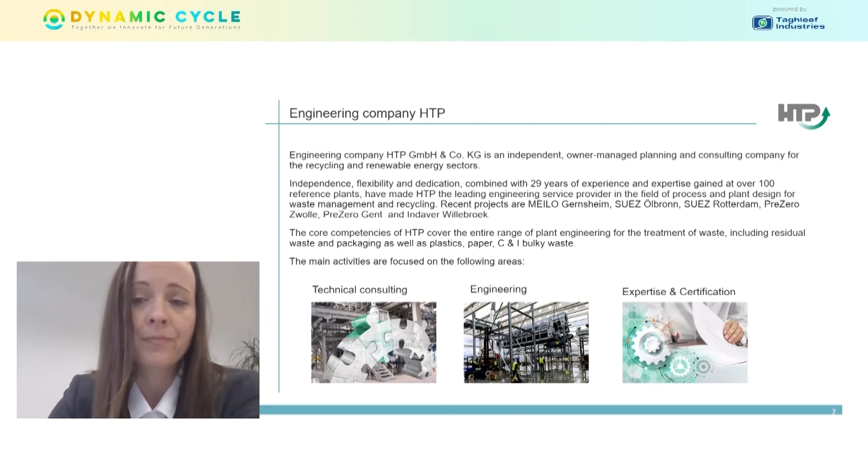Since 2011, we have carried out recyclability assessments for packaging and goods according to our own standard for packaging manufacturers and brand owners. We also perform research and development in this field. Due to the high demand, we founded the Institute in 2014 and published our own standard. We work as publicly appointed and sworn experts for packaging disposal, and perform expertises for courts and public clients in our role as sworn experts, independently and free of directions.

Our standard is an EU-wide audit standard for packaging for all material types, accepted by the industry and in accordance with the norms EN 13430 and ISO 14021. Our work is backed up by almost 30 years of experience in plant design.

One of the founders of the Institute is the engineering company HTP, which has nearly 30 years of experience in plant design; over 100 reference plants were planned by them. The core competencies of HTP cover the entire range of plant engineering for the treatment of waste, including residual waste and packaging, as well as plastics, paper, commercial and industrial waste.

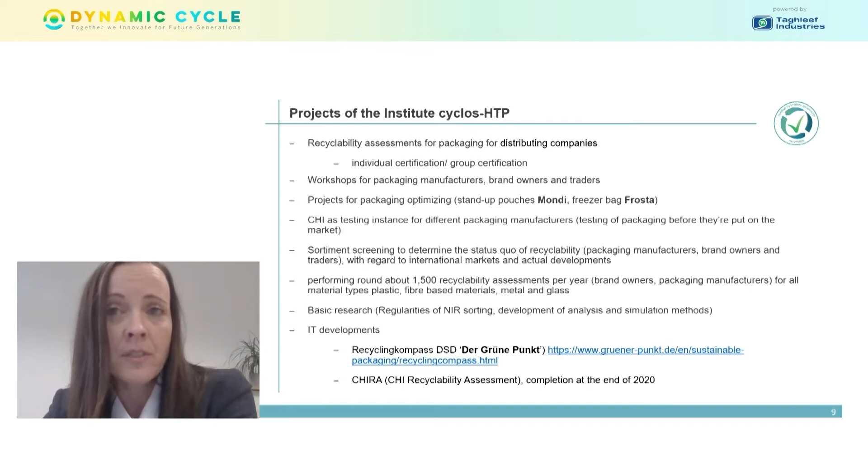The Institute Cyclos-HTP performs recyclability assessments and issues a certificate if the test result is positive. We also perform workshops to train packaging manufacturers, brand owners, and other parties involved. The Institute is a testing instance also for different packaging manufacturers, meaning that packagings are tested and accompanied in their development before they are put on the market.

The assessments are done for all packaging types, meaning plastics, fiber-based materials, metals and glass. And we also do some research and development in these fields, and IT developments like our assessment tool, CHIRA, which we would like to launch at the beginning of the next year.

CHI is not organized. CHI is the abbreviation of the Institute Cyclos-HTP. For reasons of independence, but the shareholders of CHI participate as independent experts in panels or committees, for instance, CEFLEX, the technical committee, RecyClass, and we advise the Federal Environmental Agency and the Federal Ministry for the Environment in Germany.

For instance, a recent research project is commissioned by the Federal Environmental Agency. It is the review of the effectiveness of Para 21 of the German Packaging Act and has to develop proposals for further legal development. The project period ends in 2021.

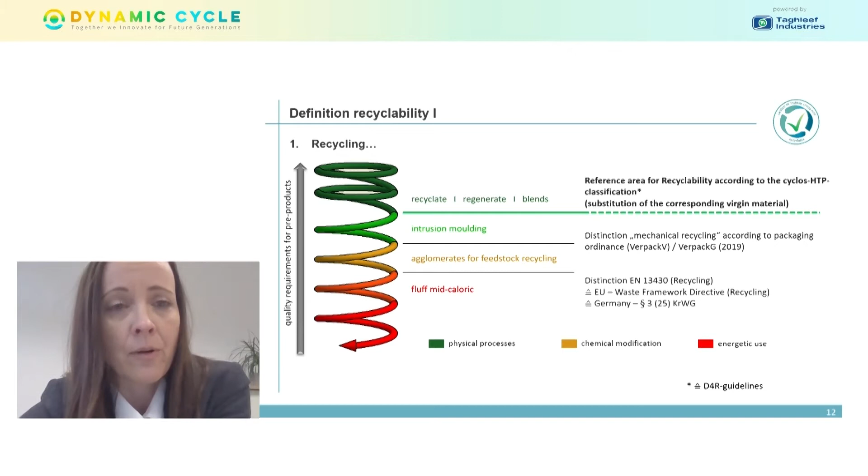For the Green Dot in Germany, for instance, we've also developed a small tool. It's a tool to evaluate the recyclability of packages as a quick orientation. This is, one might say, the little sister of the professional tool CHIRA, which will be available next year as a software program.

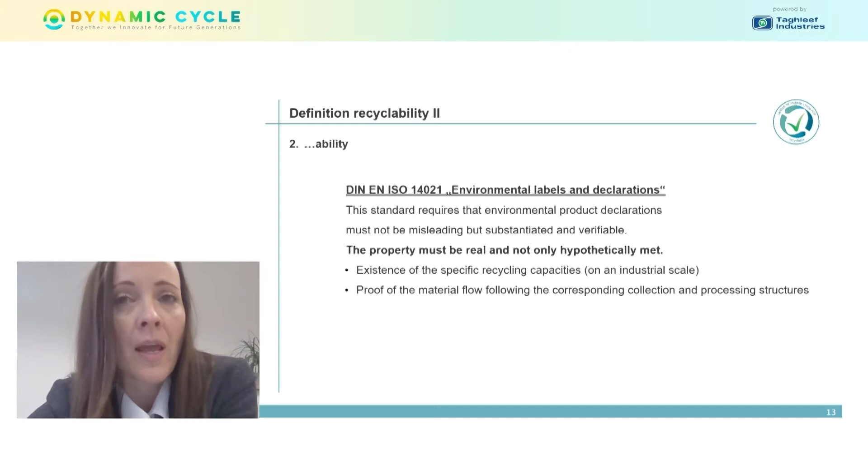Let's move on to how we define recyclability. The term derivation for the recyclability definition should be explained based on a product level. The basis of the spiral is assigned to products that are used for energy recovery processes, like fluff. The higher you get, the more the quality of the pre-products increases. So when we talk about recyclability, we always refer to high-quality material recycling.

Our focus here is on the top of the downward spiral, where a substitution of corresponding virgin material is given. Products here are recyclates, regenerates, and blends, for instance, closed-loop recycling processes like bottle-to-bottle recycling.

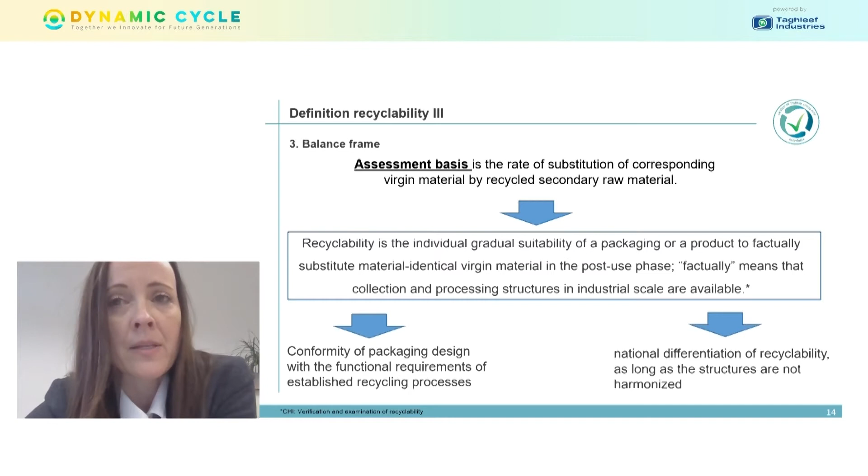But we also take into account a second, lower quality level, meaning polyolefins, for instance, from yogurt pots or trays that are reused for the production of flower pots or pipes. It's the second loop of the spiral. In this application, virgin material is replaced too. However, its use is limited in coloring or in relation to contact with food.

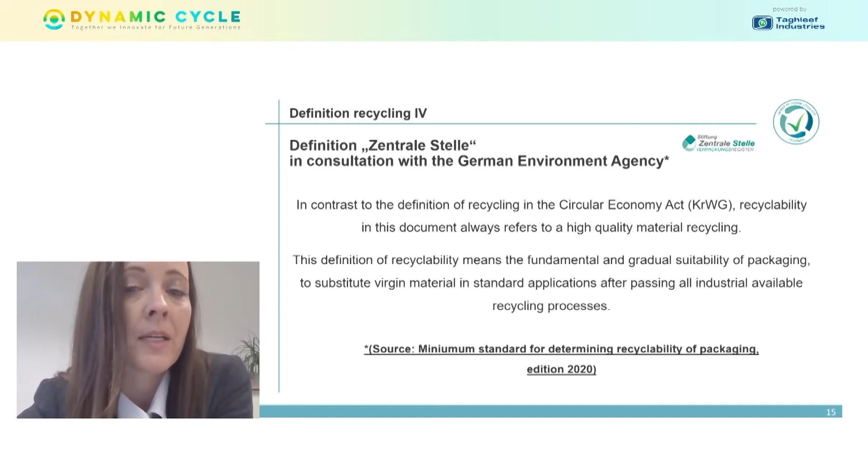What does ability mean here? It's our concern to create an environmentally relevant manufacturer's declaration. According to the standard ISO 14021, product declarations must not be misleading, but substantiated and verifiable. This means the property must be real and not only hypothetical. We need at least one applied procedure on an industrial scale and the proof of a material flow that follows established collection and processing structures.

Recyclability as a balance frame should indicate how much recyclate can be generated from a packaging or a good, meaning which share of virgin material may really be substituted. So our definition is as follows. Recyclability is the individual gradual suitability of a packaging or a product to factually substitute material-identical virgin material in the post-use phase. Factually means here that collection and processing structures on an industrial scale are available. In short, recyclability means conformity to the requirements of established recycling processes.

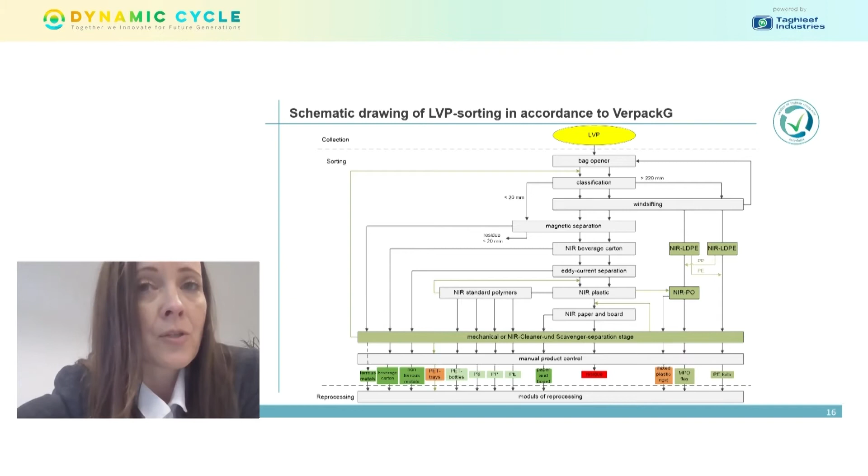The Central Packaging Agency, the so-called Zentrale Stelle in Germany, has created its own definition that also refers to high-quality recycling, so the definition is very similar. Recyclability means the fundamental and gradual suitability of a packaging to substitute virgin material in standard applications after passing all industrially available recycling processes.

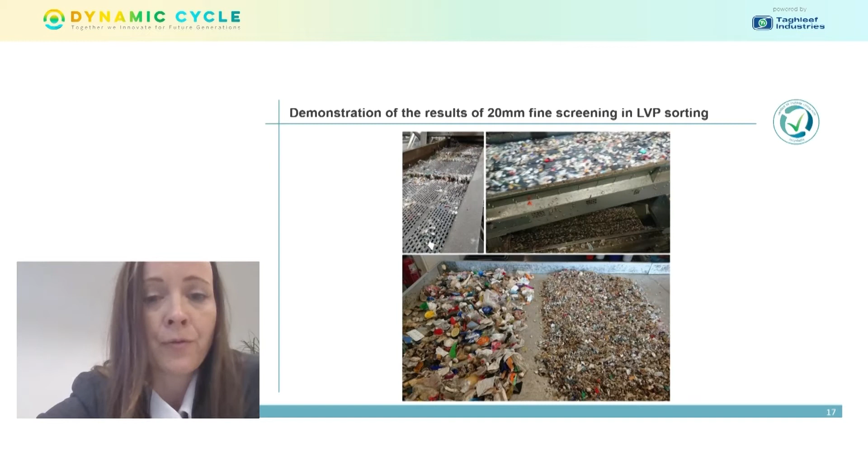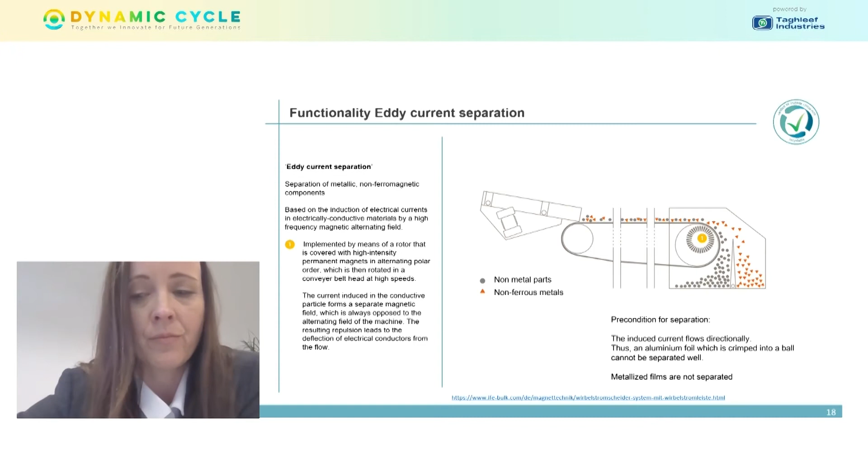In sorting plants, we have to handle big material volumes. Lightweight material has a very low bulk density, so we have throughputs of around 1,000 cubic meters per hour. Thus, the input material has to be conditioned for subsequent sorting steps via sieving machines. We have separating steps that separate 2- and 3-dimensional material via wind sifting, magnetic separation, eddy current separation, and NIR, where the standard polymers are separated. I've picked out 3 sorting steps that I would like to show in a little more detail.

One point is to demonstrate the fine screening in the sorting plants, because often people ask if very small packagings get lost during the sorting processes. And what you can see here is that in all modern plants that are built state-of-the-art in Germany, we have a cut size of 20 millimeters for a fine screening component. And this screen is built to ensure that small packaging units like caps of bottles and coffee creamer still remain in the material stream and do not pass the sieve.

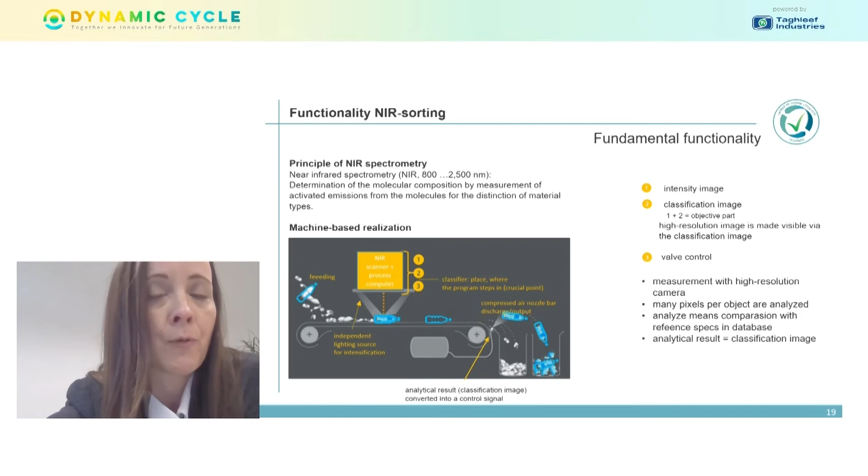The second relevant sorting step is the eddy current separation to separate metallic and non-ferromagnetic components. So the separation is based on the induction of electrical currents in electrically conductive materials by a high frequency magnetic alternating field. And the precondition here for the separation is that the induced current flows directionally. That means that an aluminium foil which is crimped into a ball cannot be separated well. Also, metallized films are not separated due to the fact that steamed aluminium foils are too thin to allow a direct magnetic field to be built.

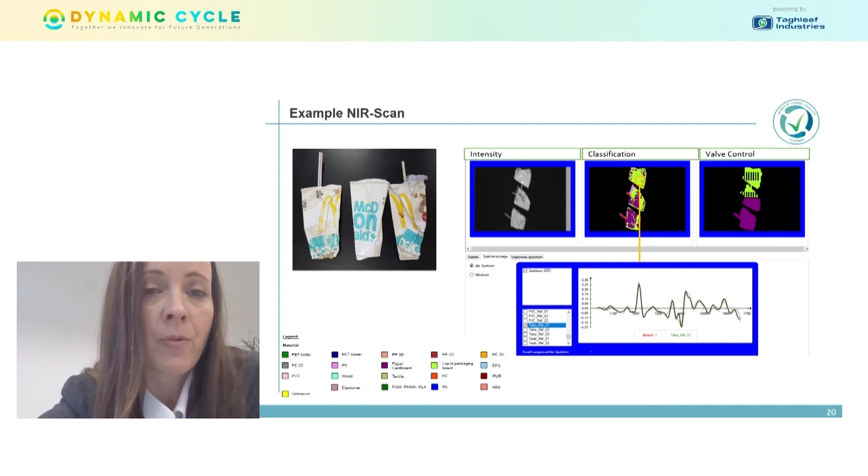The next thing, which is very important for a differentiated sorting from a multi-material mixture, such as lightweight packaging, LVP, as we call it, or PMD, plastic, metal, and drink packaging, requires using sorting NIR separators according to the state of the art. The principle is that when plastics are illuminated, they mostly reflect light in the near-infrared spectrum. The NIR sensor can then distinguish between different materials based on the way they reflect the light. And for this purpose, the objects are separated and pass under a scanner. Halogen lamps with a high NIR content are used and the reflected spectrum is measured.

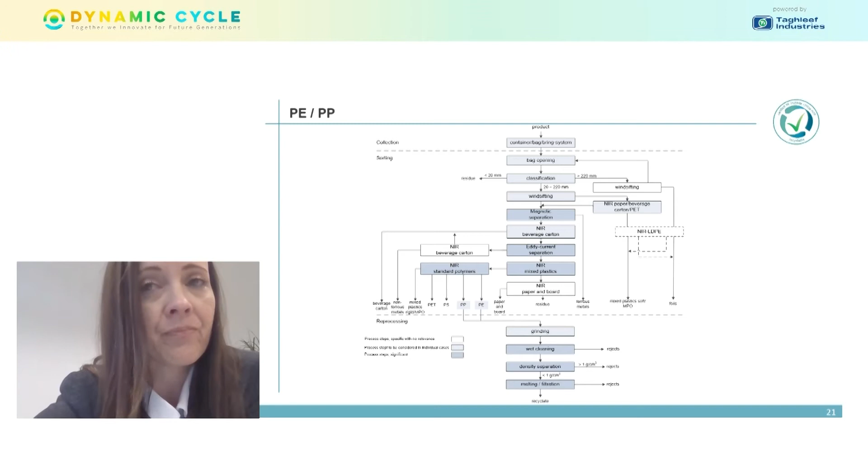On the next slide, I would like to show what the camera sees and what is made of it. With the NIR measurement, a spectrum adjustment for individual pixels is made. The result can be made visible in color for all pixels using a special software. So it's the classification image that you can see in the middle. It's a specific evaluation of our institute.

And the measurement results are then converted into control signals for the discharge, the control signal for the valve plug. In this picture, you can see a third picture, valve control, which is also made visible in colors here. The control valves remain open until the object is hit by the airstream, and so the separation is performed. Each single pixel that you get from the detection is then compared to a reference spectrum that is stored in the EDP program.

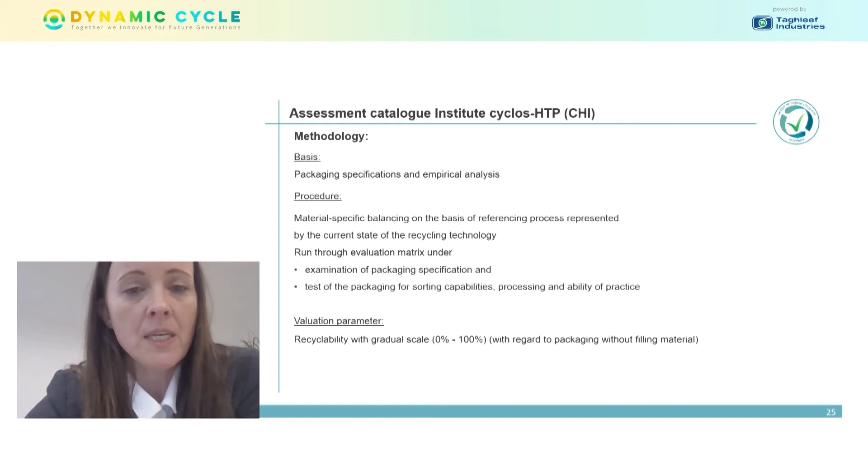We also have to take into account, when we go further, all the significant process steps that come later after the sorting took place. And we can see, for instance, on the right-hand side for films, we have for the recycling plants normally the main processing steps: grinding, cleaning, density separation, and the melting processes. So all these other steps we have to take into account when we do the recyclability assessment.

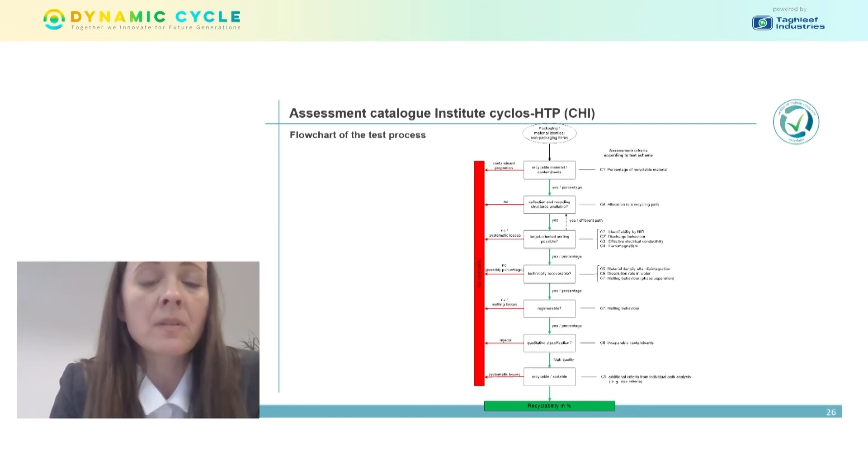I would like to go into a little bit more detail on our assessment catalog and say what's the methodology that stands behind it. The basis for our assessments is packaging specification and empirical analysis, and the procedure is built up so that we do a material-specific balancing on the basis of a reference process that represents the current state of the recycling technology. Then we run our packaging under examination through an evaluation matrix and do tests concerning the sortability of a packaging, the processability, and also the practical applicability.

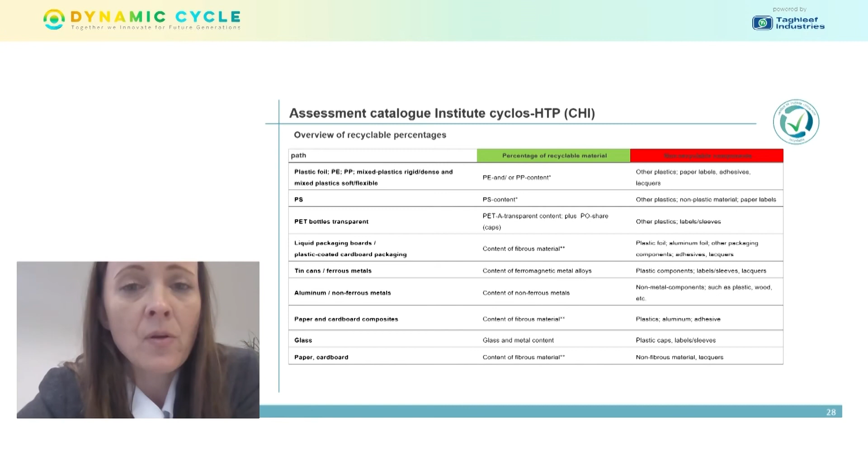The valuation parameter in the end is the recyclability, which is stated as a certain share, a gradual scale from 0 to 100%, which is of course very seldom. And the packaging is assessed without any filling material. What you can see here is how we do our assessment. So we come directly from a process description and want to make a balance for the packaging to be assessed. What happens to the packaging when it has gone through all the process steps? That is the question behind it.

What is important is that the individual steps are connected in series. That means if one of the steps is assessed as 0%, the final result is 0 too. The percentage of recyclable material is determined first, meaning everything that is not valuable, recyclable material is deducted, and the path allocation that follows is a subordinate criterion here. So if we have no collection or processing structure available, the recyclability cannot be verified unless structures become available. This characteristic leads us to the question of country differentiation, so the different national states for which the recyclability can be stated at the end.

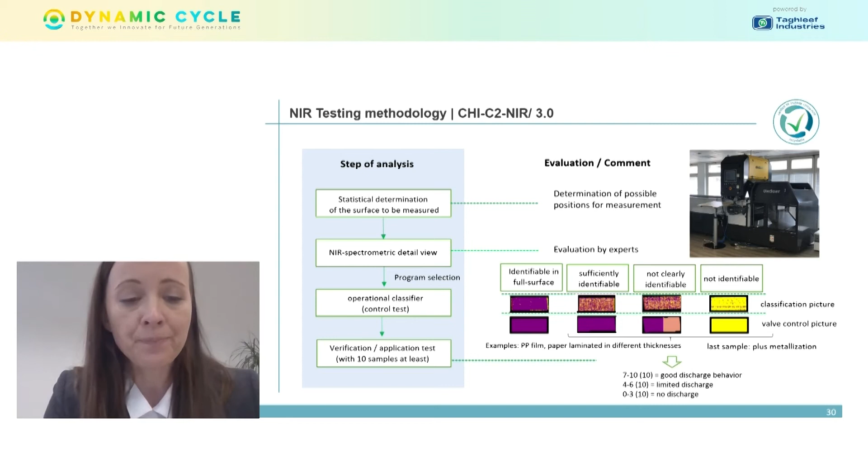The next question: is the packaging sortable in a targeted manner? So here we have to do the detection via NIR and a test of the discharge behavior, for instance. The step "technically recoverable" evaluates crucial processes in the separation of substances. For instance, this includes the melting behavior of plastics. Are there any melting losses, immiscible components, or even non-separable components that lead to significant degradation of the recyclate later?

At the last point, systematic losses are evaluated. For instance, the size criteria plays a role here, or rolling properties. If everything is fine, the packaging passes the assessment, and the recyclability can then be stated as a percentage.

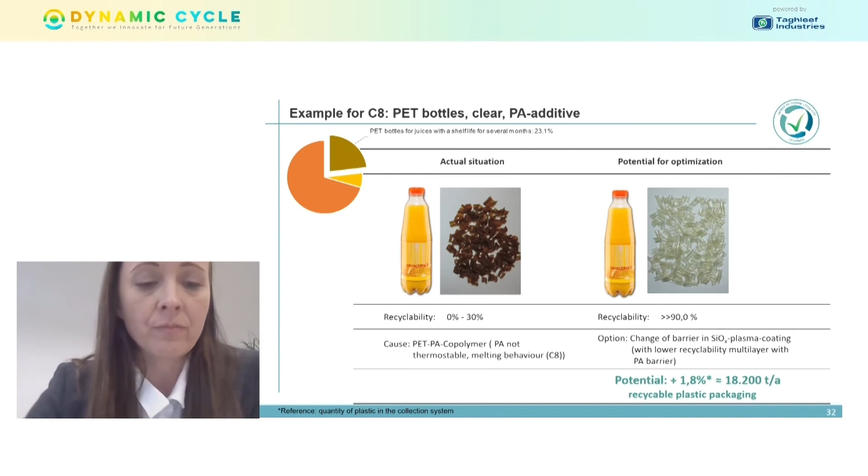What is the recyclable content of a packaging? For plastics, for instance, it is the PE or PP content. It's the first line, the first column shown here. For PP films, shares are deducted by a certain percentage due to the mechanical properties, due to the fact that only a small share of PP is allowed in certain applications, perhaps in blown film applications. So that is considered. And non-recyclable components are other plastics, paper labels, adhesives, or lacquers, for instance.

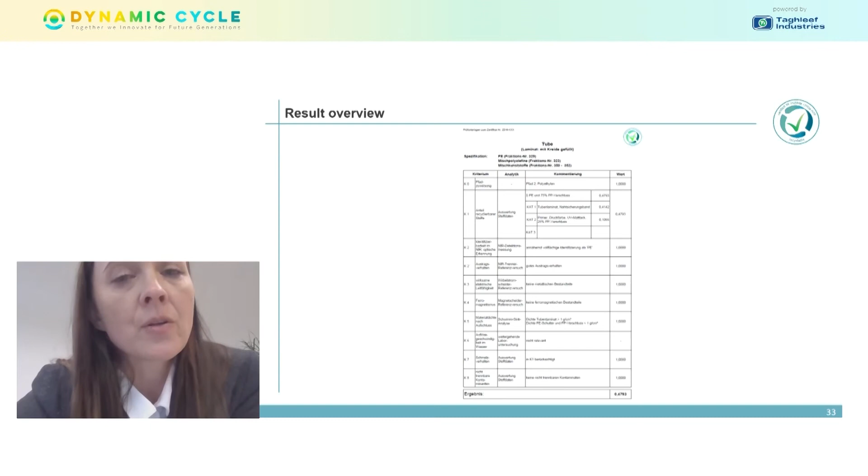steps. Category 2 are components that are not separable, but with no or minor impact on the recyclate properties. And category 3 are those that are not separable, but degrade the quality of the recyclate to uselessness. So this is a criterion for exclusion, meaning in case of Cat 3 contaminants, recyclability will be stated as 0. That's again the picture showing our testing methodology with the NIR machine.